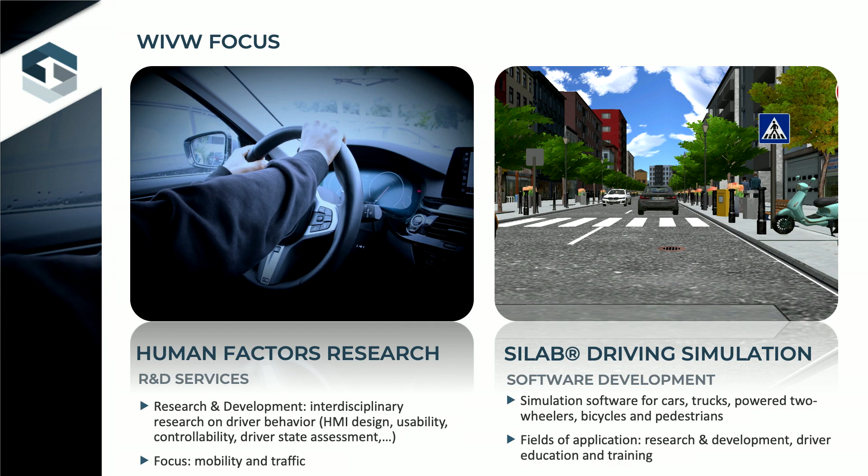A quick word on the company: the Wuerzburg Institute for Traffic Sciences that Raphael and I are working for mainly provides human factors research and development services. Whatever topic is addressed, our focus is always on the human being, on the driver, on the rider, and we do this mainly in the mobility domain. The second column of our company is the development of our driving simulation software SILAB, that is tailored to fit the needs in human factors research.

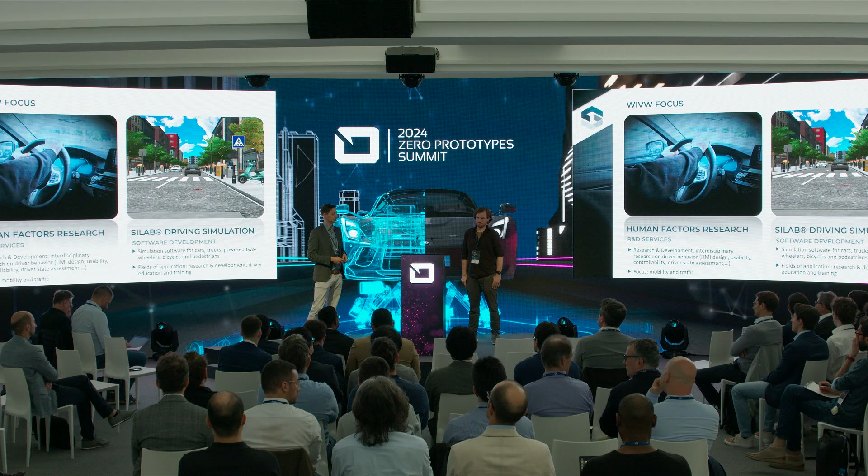For instance, we had the requirement that the virtual map is not geographically consistent, but that the map itself develops based on the driver or rider behavior. This wasn't really available 25 years ago, and that is why we started that.

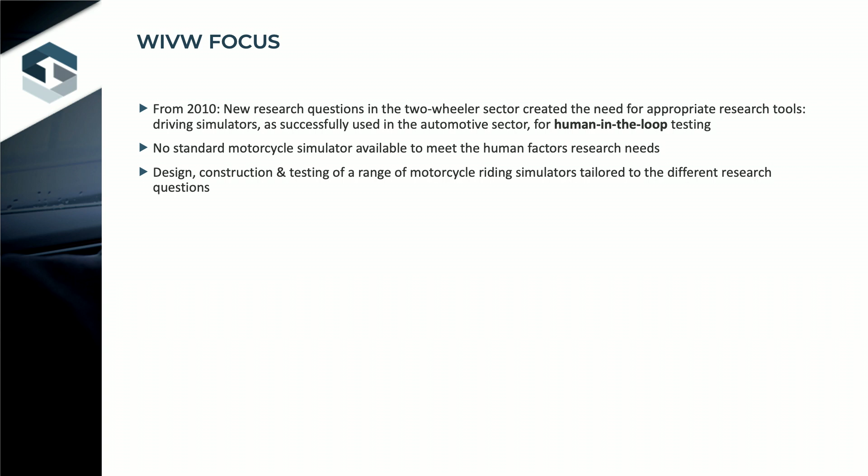That's the company. From 2010 onwards, we had more and more requests from companies in the motorcycle domain, from OEMs or Tier 1 suppliers, on research questions where we thought it's appropriate to have a powerful research tool, a simulator, such as we already have established in the automotive domain. As there was no motorcycle simulator available that you can buy from stock, we decided to design and construct our own simulator, and we will take you through that decade with the different steps in the development of the driving simulators that we are running in our company.

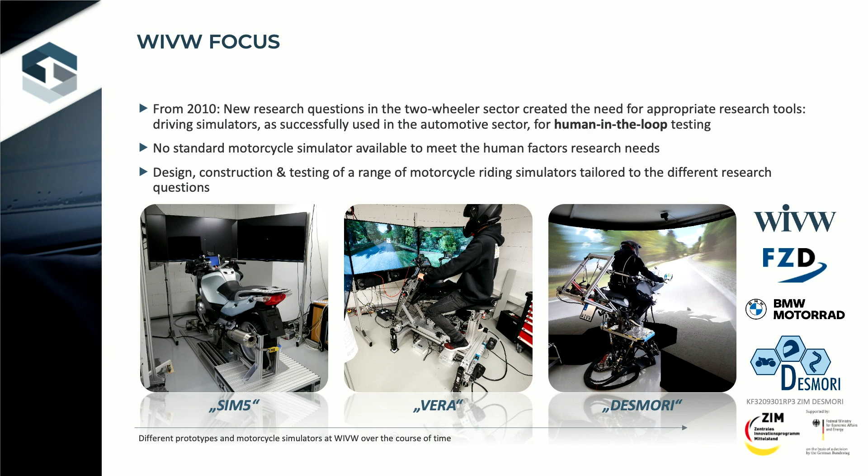And here we'll hand over for the first time. Hi everybody. So I want to give you a quick insight into why it is so difficult to build a motorcycle simulator and why it is so different than riding a real motorcycle. So I will walk you through this slide a little bit.

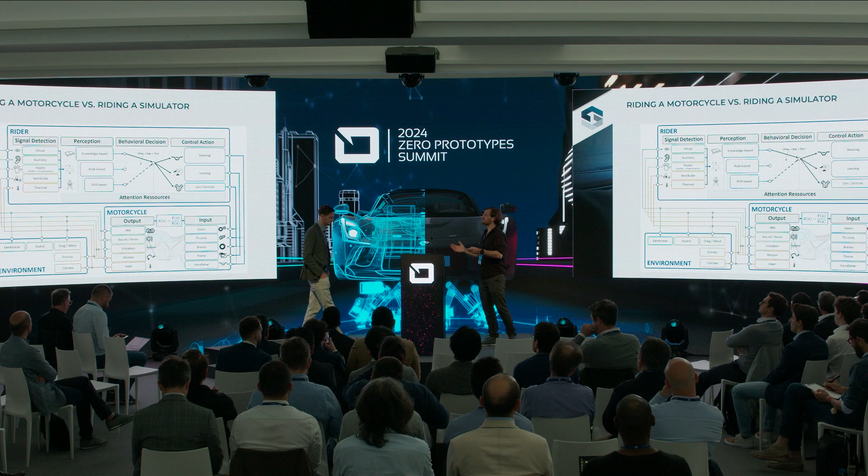We see here the standard system consisting of the rider, the motorcycle, the environment. Obviously there are a lot of signals going on. The rider can control, via the steering, via the leaning, via the longitudinal controls, everything that is happening with the motorcycle. The motorcycle dynamics can become very complex. We have all those gyroscopic effects, etc. Most of you probably know about that.

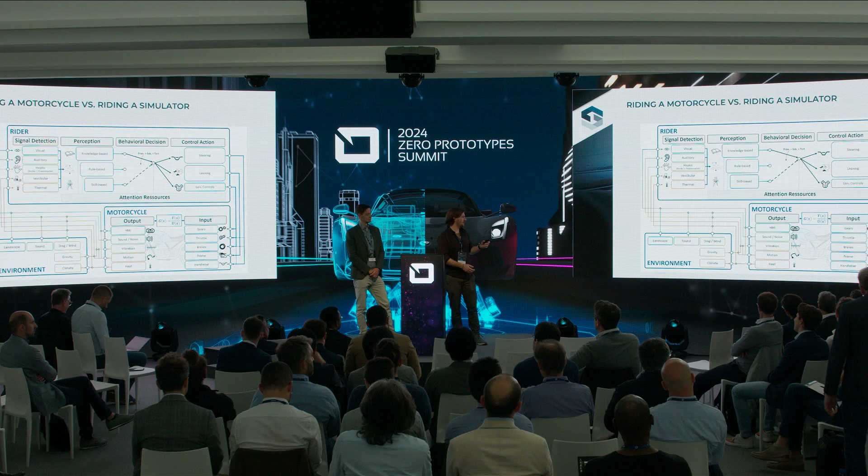And then the motorcycle generates some outputs that we as a human perceive. These outputs are overlaid with some environmental influences. And all of that is in the end perceived by the rider through visual, auditory, haptic, vestibular, and thermal cues.

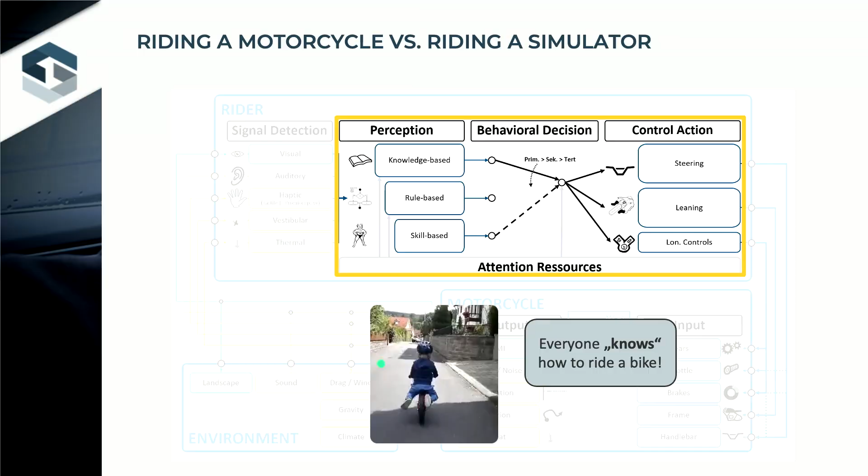Now the good thing is that how the rider behaves and decides what to do, everyone knows how to do that, right? Because we already do this since we were like 3 years old, 2 years old. So from the beginning, when we start learning to ride a bicycle, we really get a deep understanding of what we are doing on the motorcycle, on the bicycle, etc. The dynamics are the same.

But unfortunately, knowing is not really what we need in the motorcycle while riding. I can ask many, many motorcyclists what they are doing. They can try to explain something, but most certainly they are wrong in terms of counter-steering, positive steering, etc. It's not deep knowledge that they have about riding, but something unconscious, I would say.

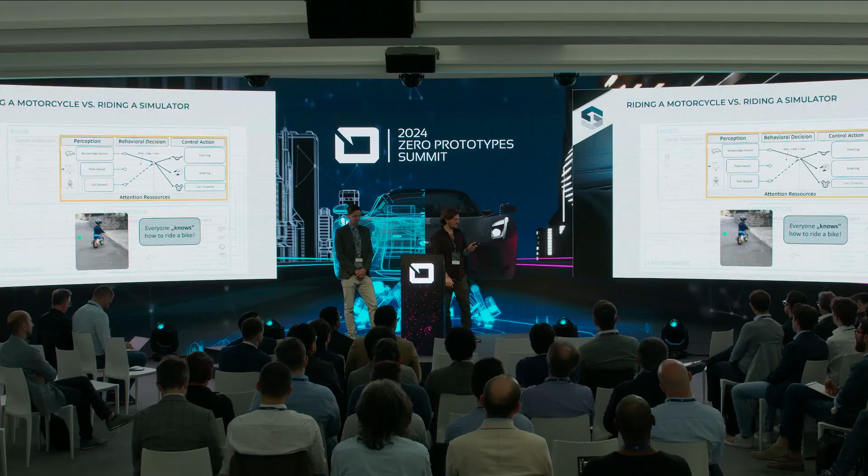And that is also a big issue with the motorcycle simulator. If we consider that in this system, with all these signal flows, all these perceptions, we exchange the motorcycle and the environment with virtual components, like the mock-up and the platform that is moving in a certain direction, and the laboratory providing visual cues, etc., obviously there will be some false cues, some resolution issues, etc. And all these topics will come down to the rider behaving differently.

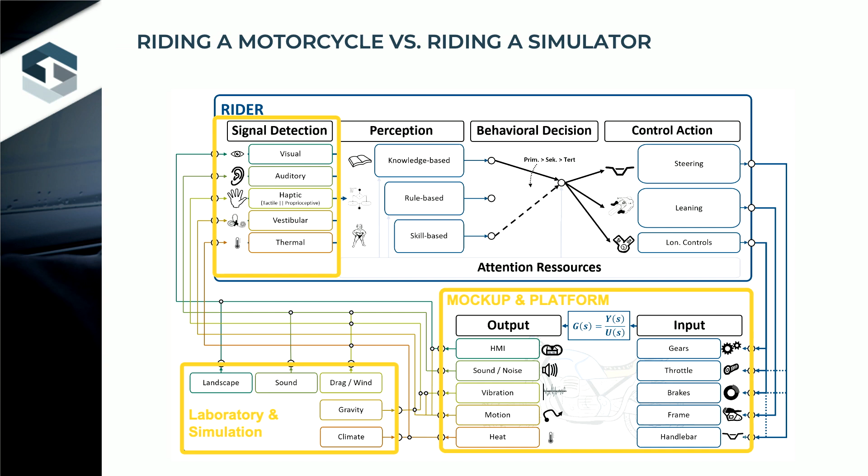Now, especially in some basic, typical riding actions like balancing, what you have to do at the first instance when you get on the motorcycle, when you're starting the motorcycle, the first thing you have to do is balance until the motorcycle develops its own self-stability. And this is a very skill-based mode.

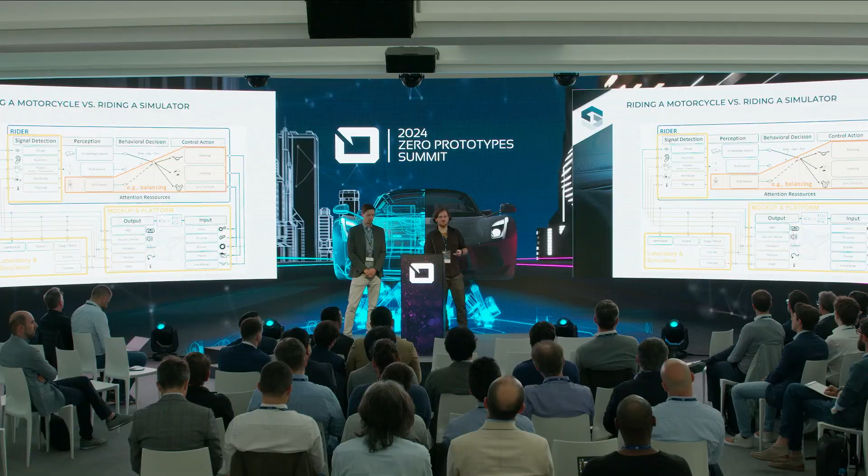This is a mode where the rider doesn't really think and understand what he should do to balance the bike, but he just does it. This has an effect on steering, on leaning, on the longitudinal controls, which are then fed back to the mock-up, to the platform and everything. So if we don't succeed in having a certain quality, this mode of balancing is rather hard to do on a simulator.

For the further course of this presentation, we will show you a little bit more detail about requirements and challenges that we have seen throughout the development in the past decade and how we dealt with them. Just a quick overview of some of the more complex topics.

We're starting with the dual loop rider control. At the beginning, when we started developing our dynamic riding simulator, we said the riders must be able to steer the vehicle by a combination of handlebar input and body motion input. We know this is true in real life too; we're not only controlling the motorcycle by the handlebar, but our body weight has an effect on the vehicle dynamics. We call that the bidirectional steer-roll coupling. As soon as the motorcycle is being steered, it will have a roll reaction, and vice versa.

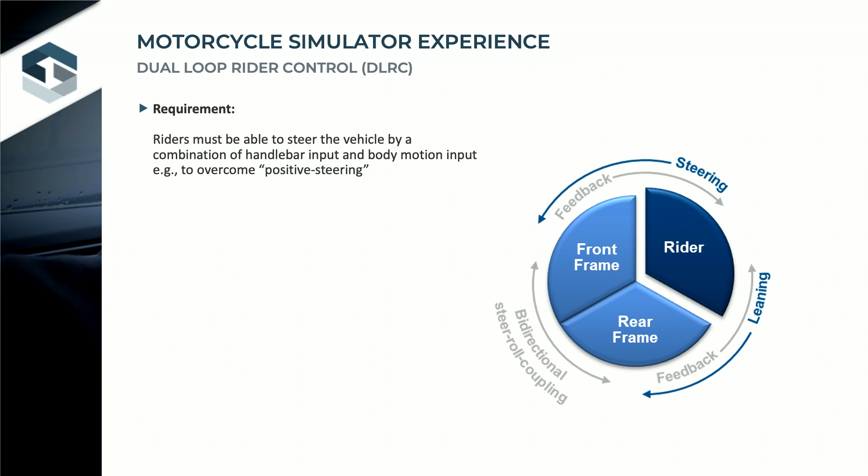Both of these steering and leaning inputs and feedbacks we can feel as a human, and we wanted to show both of them in the simulator. Our solution was developing a rider-induced roll torque mechanism. You can see that our mock-up is put on a roll axis, a mechanical axis where it can rotate about, but this rotation is stopped via a load cell, and this load cell can then measure the torque that the rider is applying.

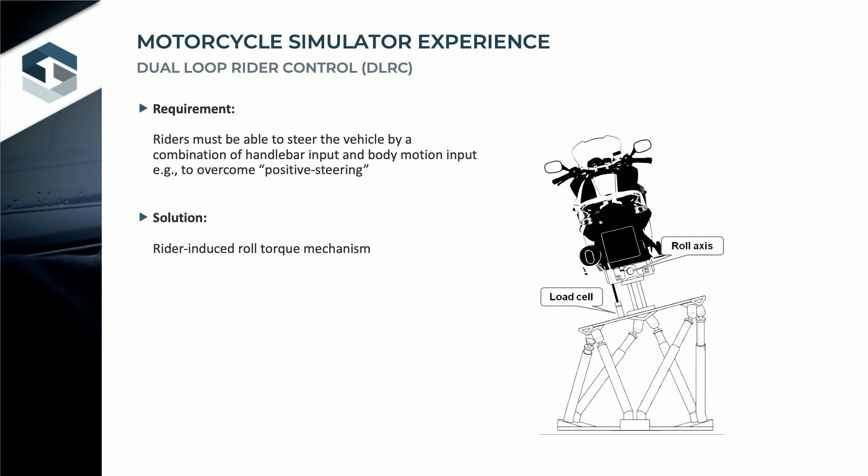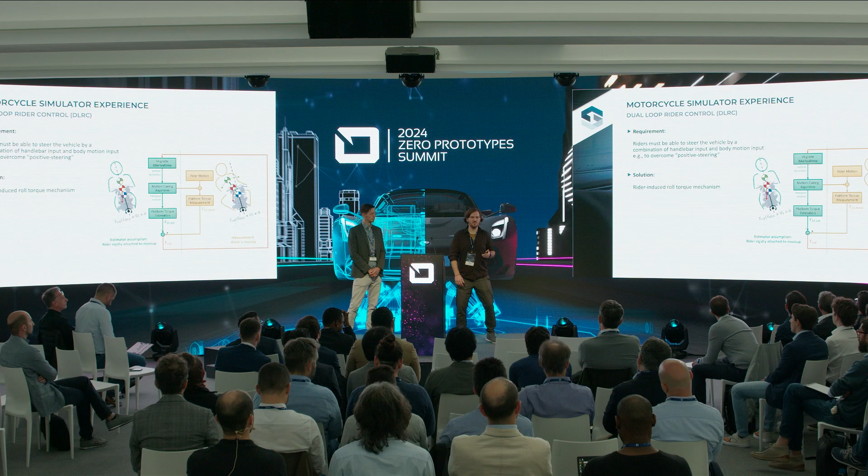Obviously, there's a bit more going on because, due to the platform motion, part of the torque acts just due to the motion of the platform and not due to the motion of the rider. But we have built some models to compensate for that. With this, we are able to really measure what the rider is doing on top of the bike. Then, with that, you can ride free-handedly, or you could use this torque measurement to put your feet down and balance the motorcycle between yourself.

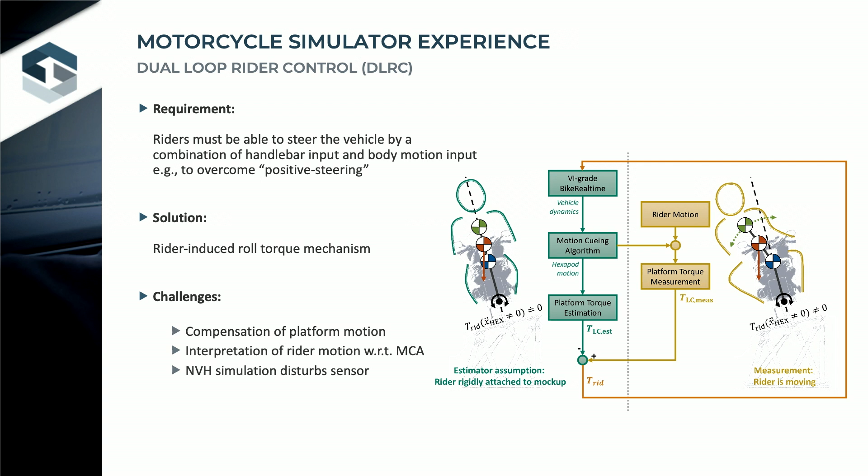Obviously, this comes with a few challenges. We have to compensate for the platform motion, as I mentioned before. Also, we have to interpret the rider motion with respect to the motion cueing algorithm, so depending on the motion that we apply to the platform, this will change. And NVH is a big topic—as soon as we induce vibrations to the platform, this will disturb the sensor signals.

The second point we want to talk about is the motion cueing algorithm and the steering control. Our requirement was that proprioceptive and haptic feedback is rather crucial for the rider to control the motorcycle, and the vehicle is susceptible to lateral dynamic inputs from the rider. This motion that the platform or motorcycle does also has implications on the steering behavior and the stability perception of the motorcycle.

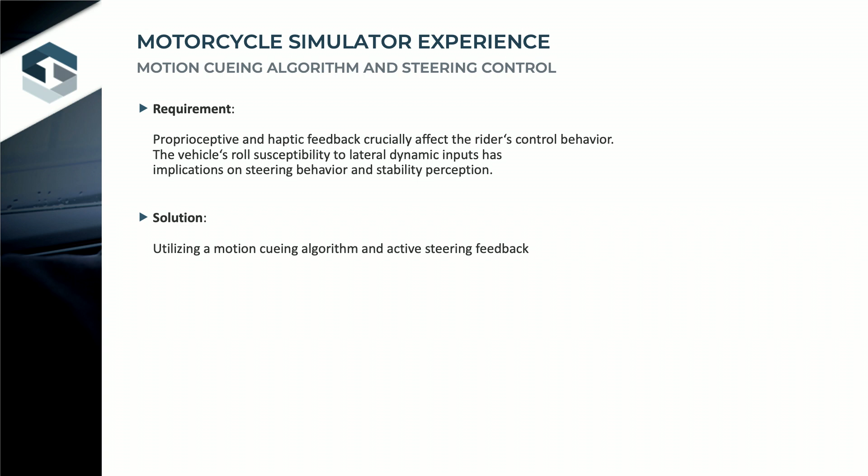So it was clear for us at the beginning that we want an active system. We do not want a static simulator, we want a dynamic one. We want to use a motion cueing algorithm and active steering feedback. There are some difficulties with that. Obviously, when riding a real motorcycle at 45 degrees of roll angle, you are pushed into the saddle because there's a lot of lateral acceleration going on. We don't have that on a simulator. Therefore, when we tilt the motion platform 45 degrees, we would fall down rather than being pushed into the saddle. So obviously, some translations have to be done to make it feasible.

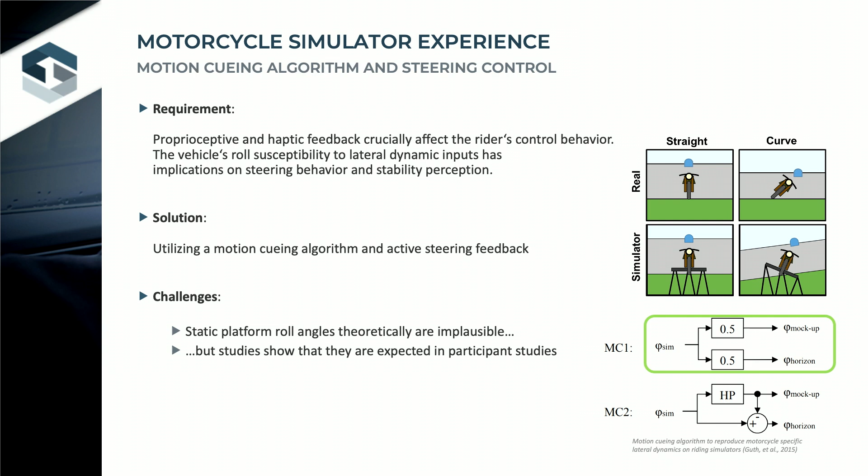One would argue that in that case it would be perfectly fine and reasonable to keep the motorcycle simulator upright, because the resultant force is vertical with respect to my body. But we have done some studies, and we found out that actually the study participants preferred a motion cueing that was active—they preferred to be presented with a roll angle. And yes, we have the data for that. Since we did that study in 2015, we followed that path, and we are very happy with it.

The whole motion cueing, as I said, also depends heavily on the steering behavior. There are different control concepts, like impedance control and admittance control, that one might know from robotics. Unfortunately, these two control theories go like separate paths. But in the motorcycle domain, we basically need both of them, as one algorithm performs better at low speeds when we have large steering angles, while the other control algorithm especially benefits us at high velocities when we have very stiff steering.

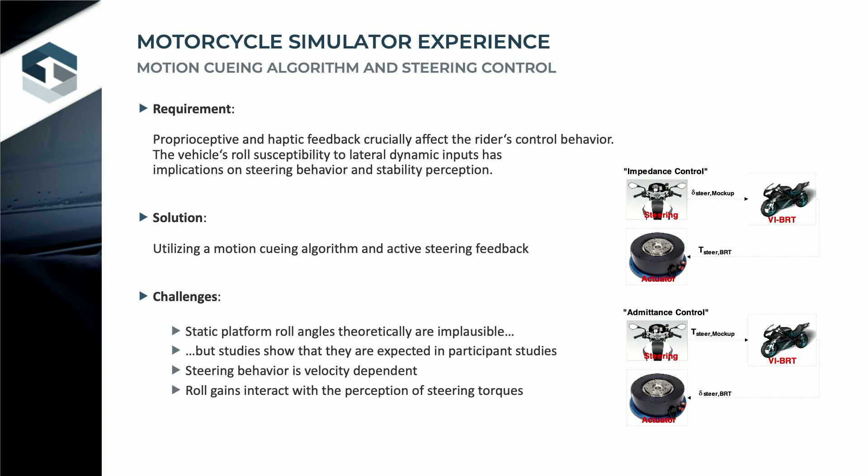What we found out is that if we start tweaking all these control algorithms and playing with the gains, for example, just a small change of the platform roll angle gain will have a huge impact on what you feel in the steering. So suddenly, when you have more roll gain, you will feel a weaker, softer steering. There are a lot of cross-correlations in that regard.

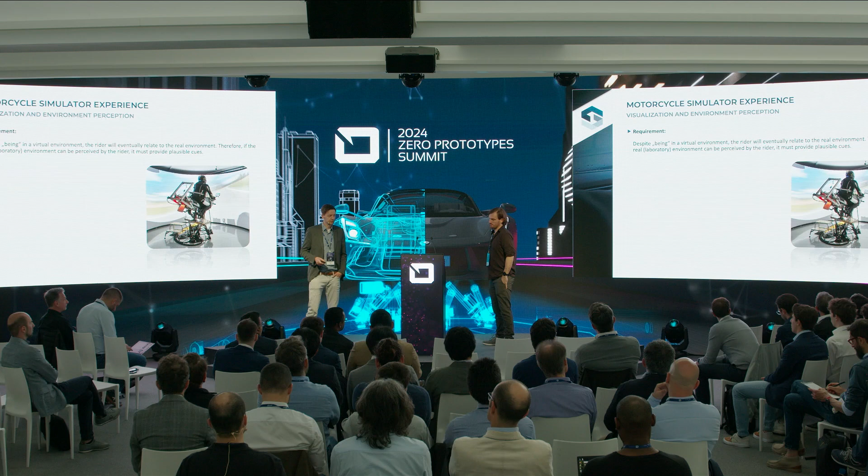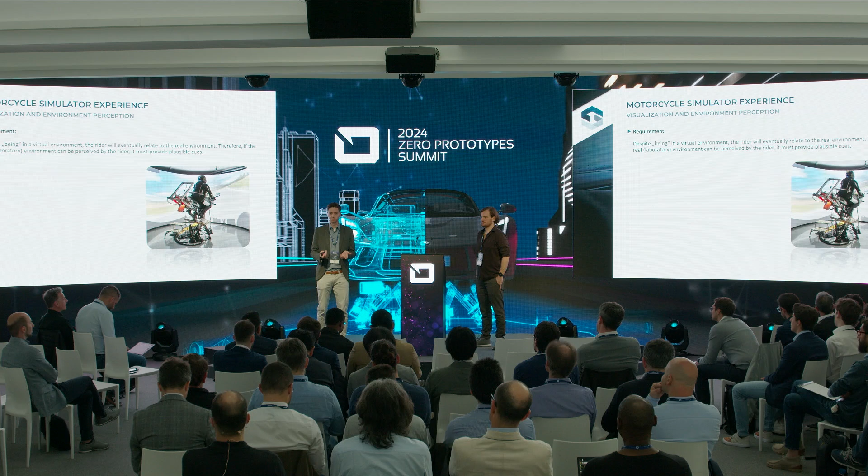Another challenge we had when designing that simulator is that in the passenger car domain, typically a lot of the environment is covered by the bodywork of the car itself. But for the motorcycle rider, he or she has the possibility to look down on the road, and the peripheral vision of how the road is moving underneath your motorcycle is an important cue for speed perception. So we needed our environment to provide these cues to the rider, and therefore we added a floor projection screen so the rider gets the cues necessary to judge speed appropriately.

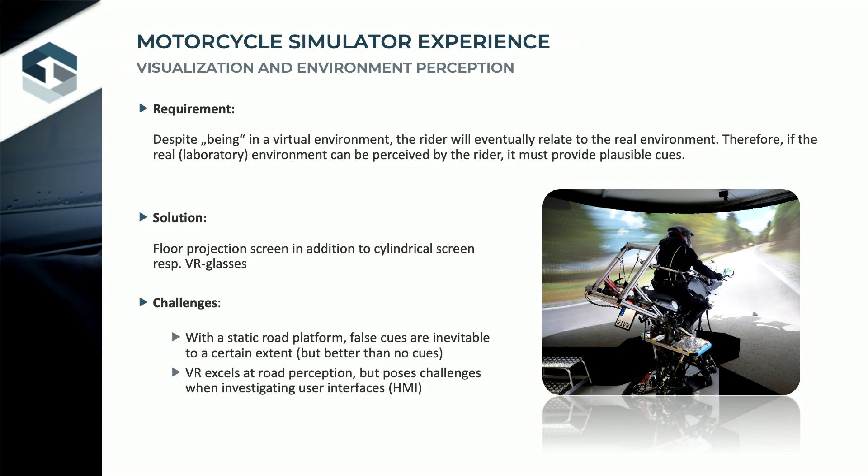Another solution is working with VR glasses, which we did, but both come with certain other challenges. On one hand, you have a vertical screen and a horizontal screen, so there's a certain bias in how you present the virtual environment with a floor projection screen. On the other hand, with our customers we're typically interested in how riders interact with the HMI, for instance different controls on the handlebar, and if you're working with VR glasses you're missing the natural sight of your hands. That's why this isn't the one and only solution, and we tailor it to the research question we have, deciding which one to use.

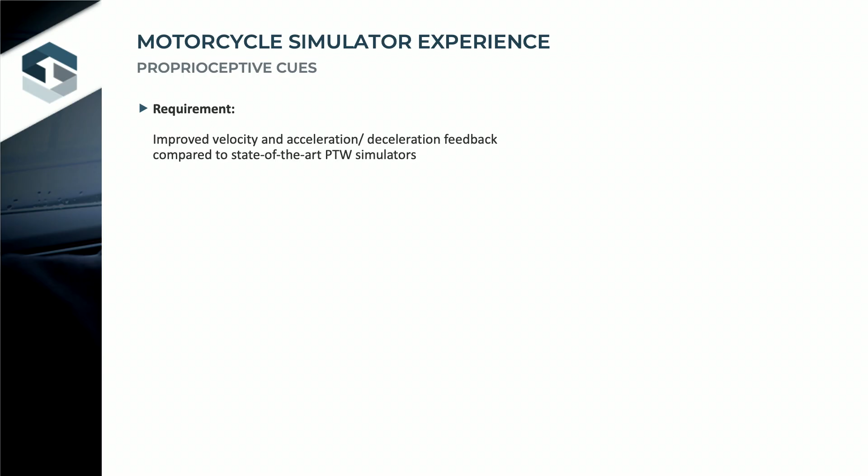Another big topic was that in the beginning, riders were somehow lacking the proper feeling of speed and also acceleration or deceleration—when braking feels like hard braking versus just soft braking. So we realized an important proprioceptive cue is missing. In reality, you have wind forces against the torso of the rider, so you feel the muscles in your stomach or neck that you need when going at 120 kilometers per hour, for instance.

To compensate for that, we built this rope towing mechanism, which substitutes those drag and inertial forces to the torso. We ran a study comparing whether this really creates a benefit in terms of speed perception, and it clearly does. So at the moment we are using this for longitudinal cues—for acceleration you're pulled to the back, and for deceleration towards the handlebar.

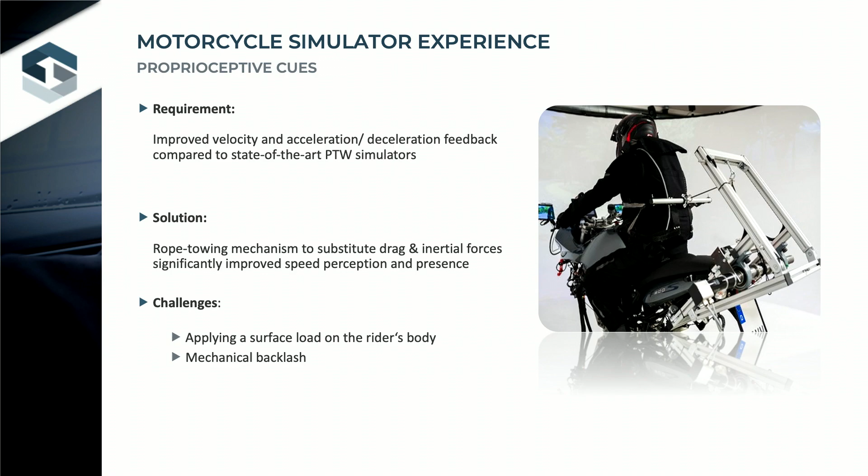This is working quite well, and the challenge was how do you apply this force to the torso so that it doesn't feel like you're wearing a backpack? Our solution was working with this motorcycle airbag jacket so that you have a surface load on the whole torso, which feels more natural.

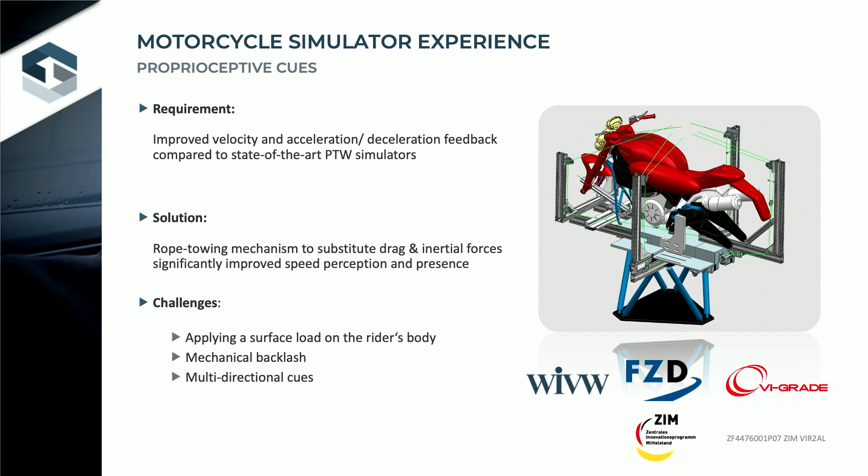Of course, mechanical issues such as backlash remain, but those have been solved in other topics as well. We had an interesting project together with VI-grade and the Technical University of Darmstadt, where we thought about adding another direction to this rider input. So we could also pull the rider to the side and keep him or her in a certain position. This can even be extended with more directions, but we might hear more about this later on from Diego.

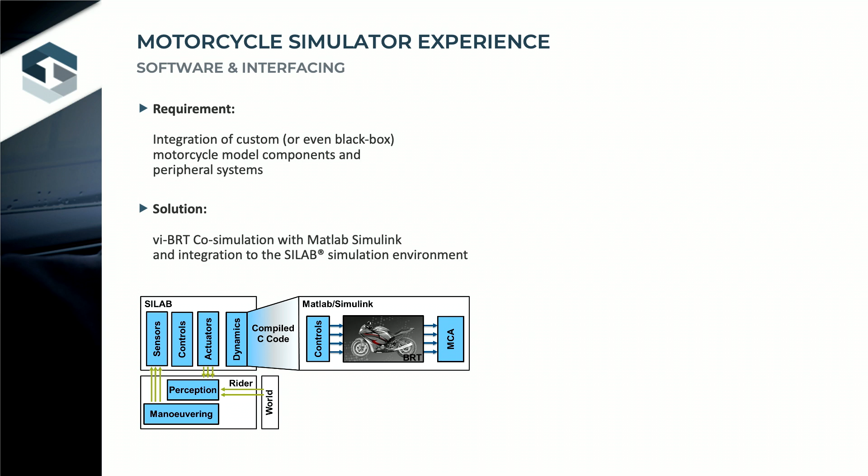All the technical setup, software, etc., was done very easily, thanks also to the VI-grade system. We were able to integrate BikeRealTime within a framework of a Simulink model, which is then compiled into C code that is used in our own simulation environment.

We can talk a lot about all these design topics, but the most important thing maybe here is that with the VI-grade toolchain, we're able to test different customer models even if those files are obfuscated. So we can receive any dynamics model from any customer, without any IP issues, for example, and bring it onto our simulator.

Obviously this brings one challenge: how do these model adjustments cope with a mock-up that is basically constant? We are not changing ergonomics, etc., at least for now.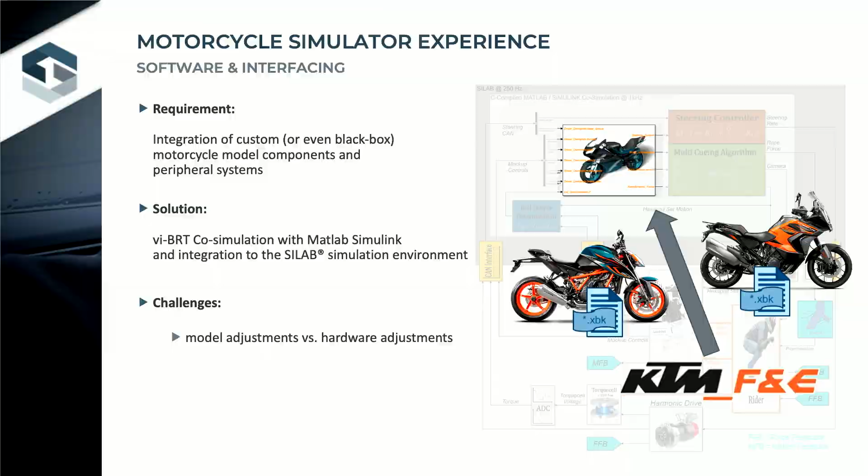So these have been a few points where we have concentrated during the development in recent years, and that brings us to the conclusion. We have done many successful human factors related studies in recent years, talking about distraction assessment, rider assistance, etc. This is the main part we do with our Human Factors Institute, but we also obviously want to concentrate on the dynamic aspects.

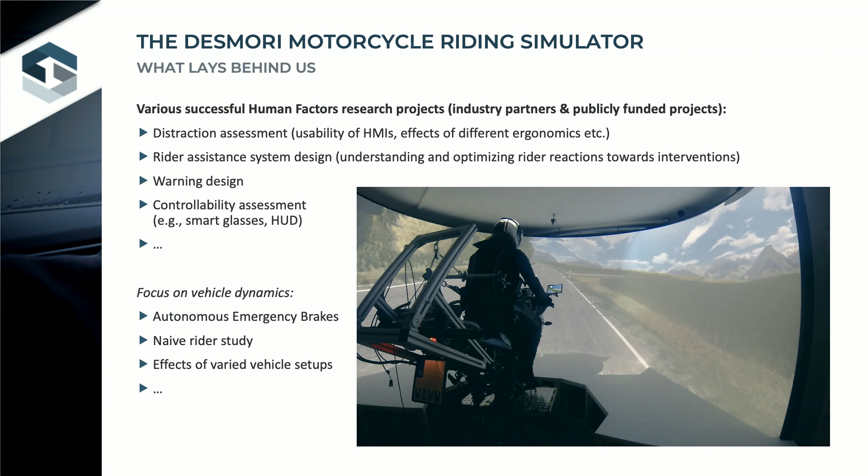We have done emergency brakes with motorcycles. We have done a naive rider study where pure motorcyclists with no experience with any kind of simulator were able to ride our simulator just by knowing how to ride a motorcycle. We also investigated effects of varied vehicle setups, as shown before with these different motorcycle types, a study we did, for example, with KTM.

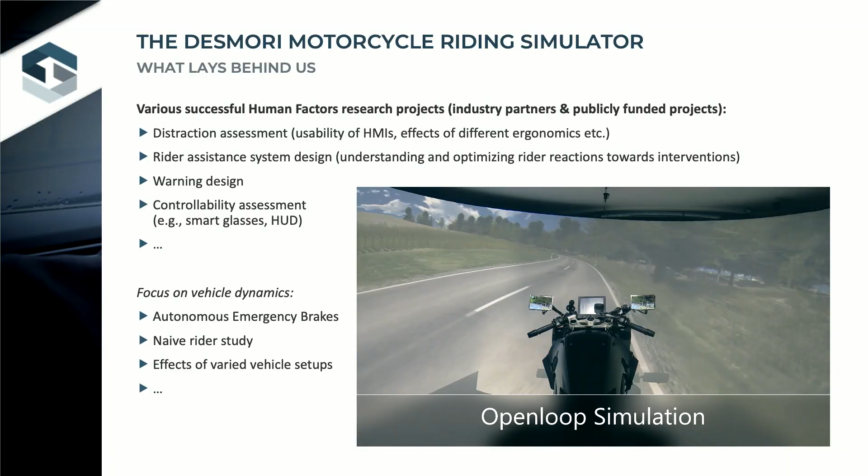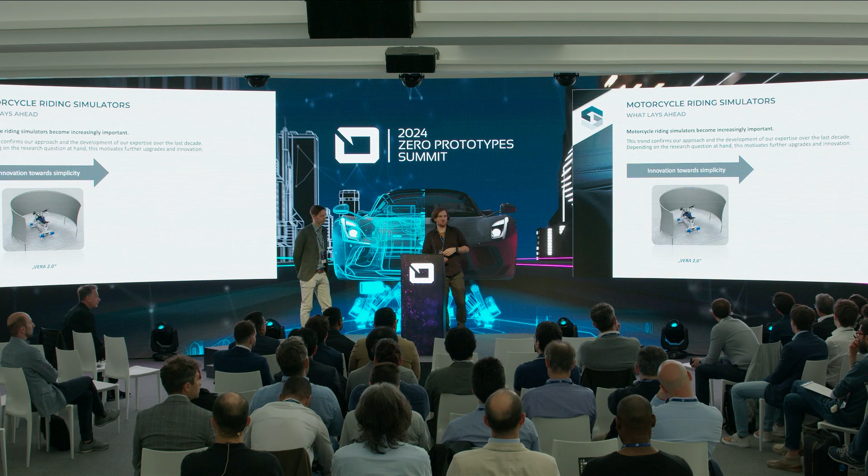In the future, we want to concentrate a bit more on some further developments. One step would be to go further towards simplicity of the setup—we see that our Desmori simulator can be a bit overwhelming, and it's sometimes easier for a customer to use a simple, stripped-down simulator. But we also want to improve on the technology, and as shown before, multi-directional vestibular feedback and multi-directional rider input are definitely something we'll look into in the future.

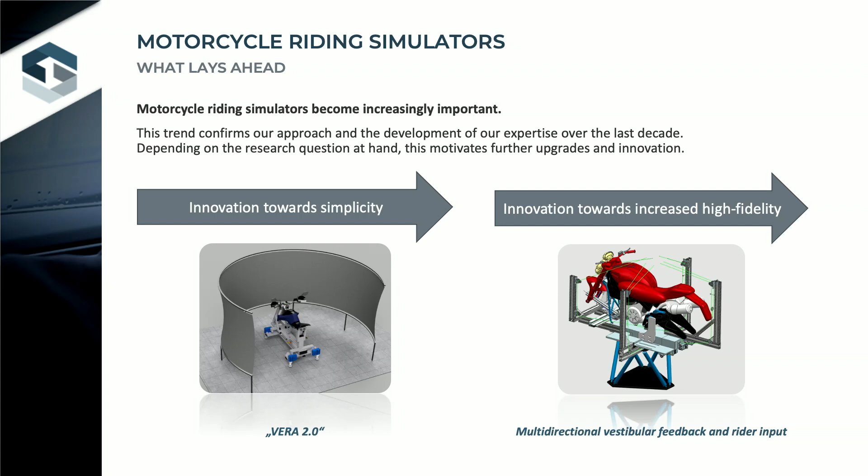And with that, we conclude our presentation. Thank you.